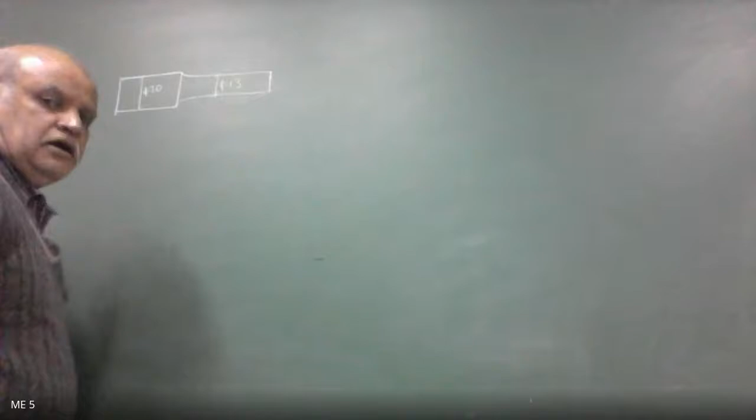And a fillet radius of 3 mm. So this is fillet radius of 3 mm, right? And it is subjected to F Newton upward and 3F Newton downward. So there is load F Newton upward and 3F downward. That is the load it is subjected to.

The shaft is stepped down from 20 mm to 13 mm, with a fillet radius of 3 mm.

The length of the shaft is 150 mm. So the total length of the shaft is 150 mm given in the problem.

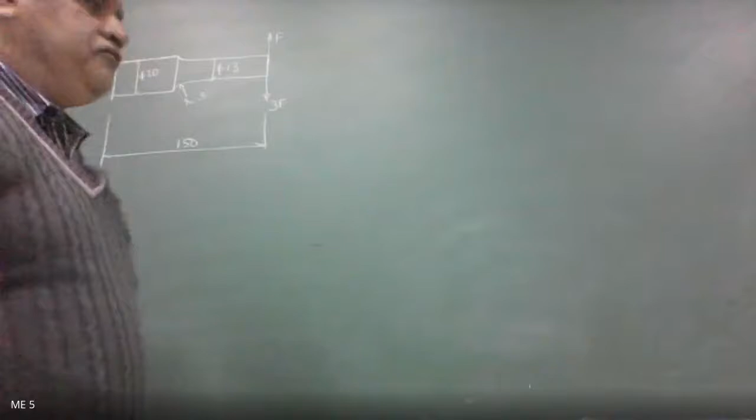The fillet section is at a distance of 25 mm from the fixed end. So this is the fixed end, and fillet section is at a distance of 25 mm from fixed end. So therefore, this distance is going to be how much?

125 mm. Okay, right. Determine the maximum load that the member can withstand for infinite life. Assume a FOS of 2.

The material is cold drawn C26 steel, for which yield stress is 470 Newton per mm square. Ultimate stress is 550 Newton per mm square.

Notch sensitivity for 3 mm radius for this material is how much? 0.9. Okay, so we are given with the value of yield stress.

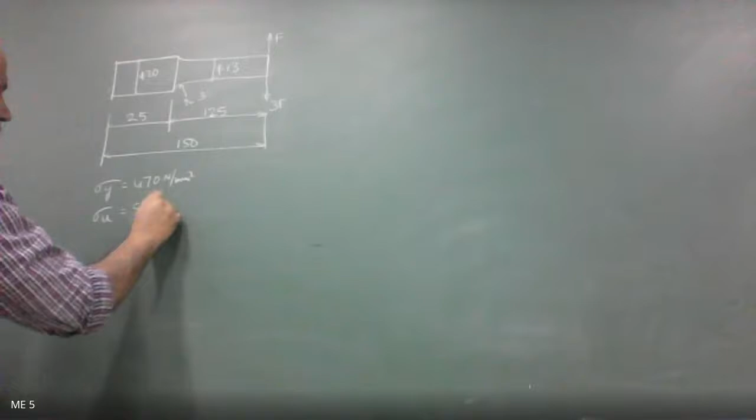What is the value of yield stress? 470 Newton per mm square. Then ultimate stress is given by sigma u is 550 Newton per mm square. And what else is given?

Notch sensitivity factor Q is equal to 0.9, and from the given description of the problem, we can make out capital D to be equal to 20 mm, small d is equal to 13 mm, and the radius of fillet is equal to 3 mm. This is what is given, and this distance is 125.

And we are given with factor of safety n is equal to, what is the value of factor of safety given there? Is equal to 2. Okay, this is the data that is given.

This is the sketch that we can make out. Is the sketch visible in your screens clearly? Yes, sir. Okay, because I have shifted my laptop a bit closer to board, that's why I just wanted to clarify.

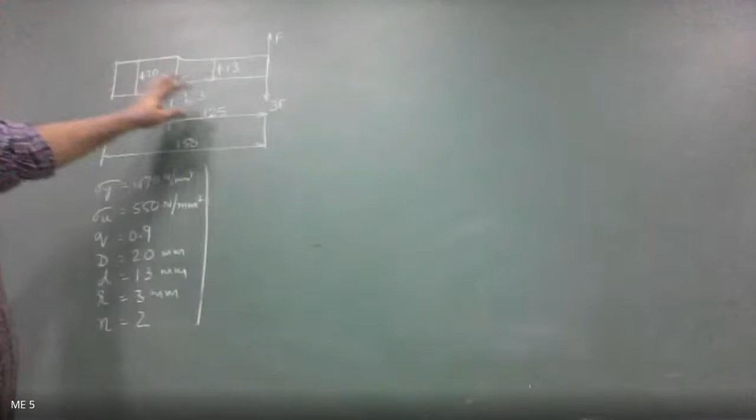So this is the sketch given in the problem. There's a stepped shaft which is stepped down from 20 mm diameter to 13 mm diameter. Total length of the shaft is 150 mm, and the step is at a distance of 25 mm from the fixed end, and it is subjected to F Newton upward and 3F Newton downward.

This also I can write: F max is equal to 3F, F minimum is equal to F.

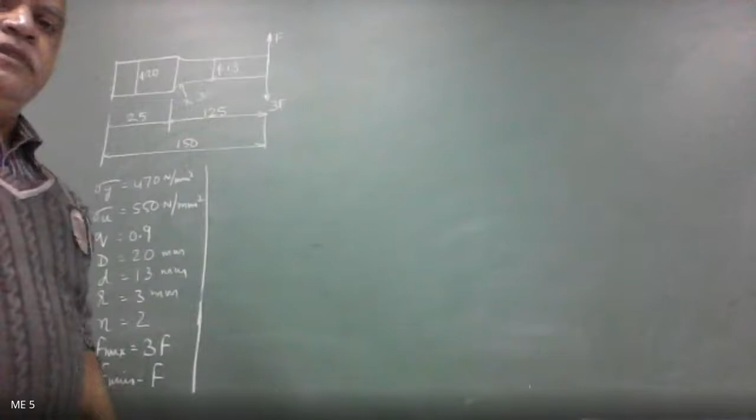Now, what is the type of stress that this component is subjected to? Is anyone there, or all have left?

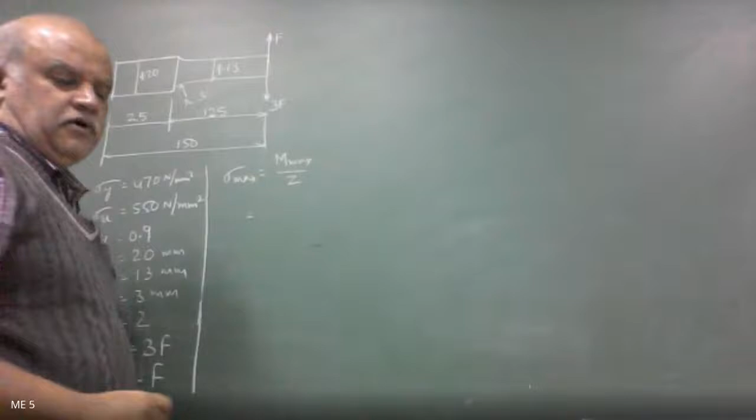Bending. Okay. Anyway, sigma max is equal to M max divided by Z. So we have F max, which is 3F, acting downward in clockwise direction. I take it as positive, and I take the one acting upward to be negative.

So therefore it is 3F into distance, with reference to change of cross section, so therefore it's going to be 125 divided by pi into d cube, that is pi d cube by 32, will give me sigma max equal to a value in terms of F. So that I'm going to get it as 1.74 F. Please check.

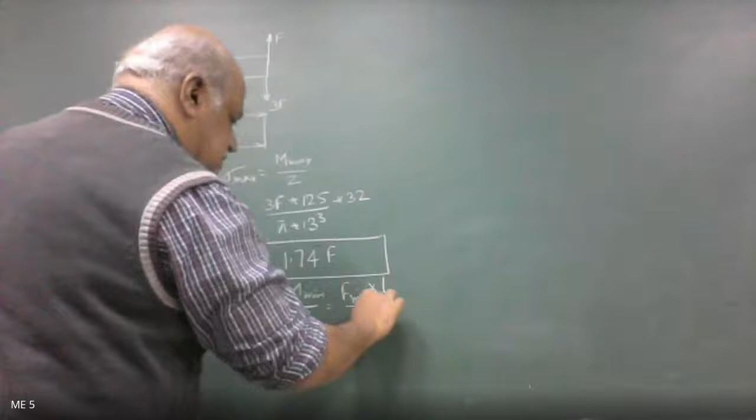Then sigma minimum is equal to M minimum divided by Z, that is equal to F minimum into distance L by Z. So here also it is F max into length divided by section modulus.

So therefore F minimum is minus F into distance is 125 divided by pi into 13 cube by 32. So therefore sigma minimum is equal to, you get another value in terms of F. Is that okay? Fine.

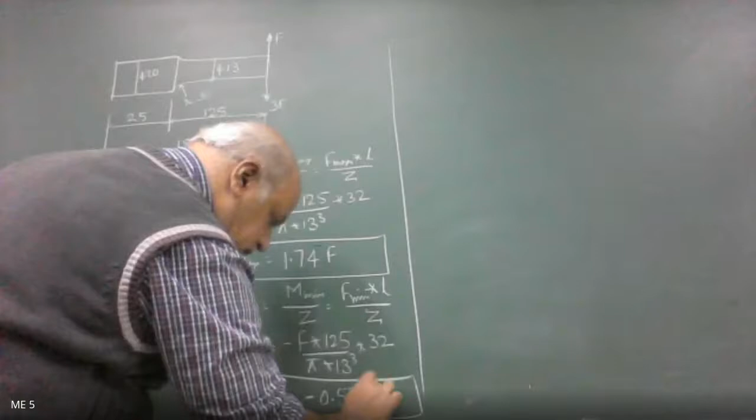0.579, minus 0.579 F. Correct? So this is what we get as minimum.

Maximum and minimum we have got. Next job is to find sigma mean, that is sigma max plus sigma minimum divided by 2. So sigma m is equal to 1.74 plus minus 0.579 divided by 2. What is the value of sigma mean? You'll get sigma mean to be equal to 0.58 F.

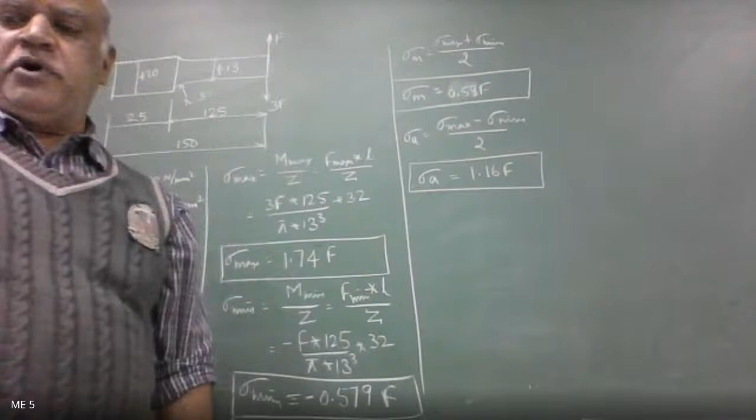Correct? Please check. Sigma amplitude is sigma max minus sigma minimum divided by 2. So stress amplitude is equal to 1.74 minus minus 0.579 divided by 2. That should give you stress amplitude equal to 1.16 F. So stress amplitude I get 1.16 and this 0.58 F is the mean stress.

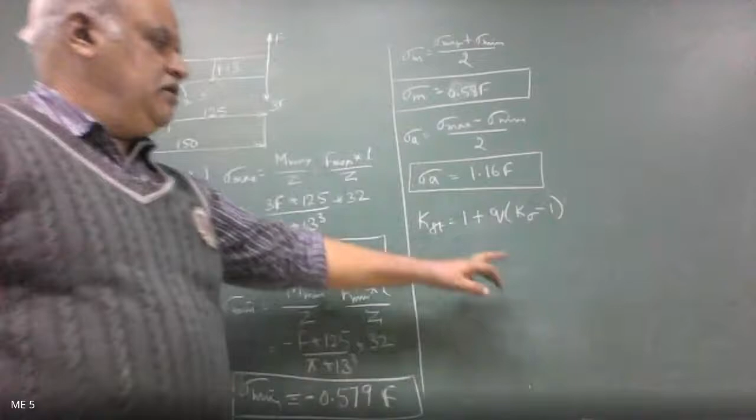Now we are given with notch sensitivity factor Q also. It's a stepped shaft with fillet radius given. So my job: KFT is given by 1 plus notch sensitivity factor into theoretical form factor minus 1. So we need to find out K sigma for the given member.

For that, we are given with capital D and small d. Find out capital D by small d, that is 20 by 13. That should give you the value 1.54. And R by D is 3 by 13, that is equal to 0.23.

Now get me the value of K sigma. It's a stepped shaft subjected to bending moment. So from the given graph, we get K sigma to be equal to

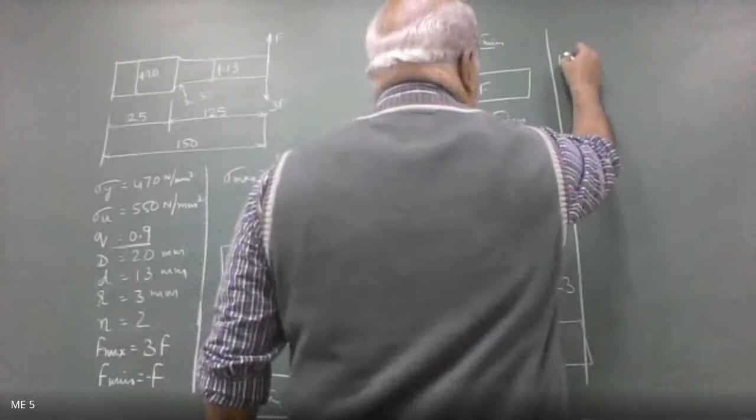1.38. Substitute this value of K sigma in the equation of fatigue stress concentration factor to get KFT value. So when we substitute, KFT is equal to 1 plus 0.9 into 1.38 minus 1. That should give us KFT to be equal to 1.34.

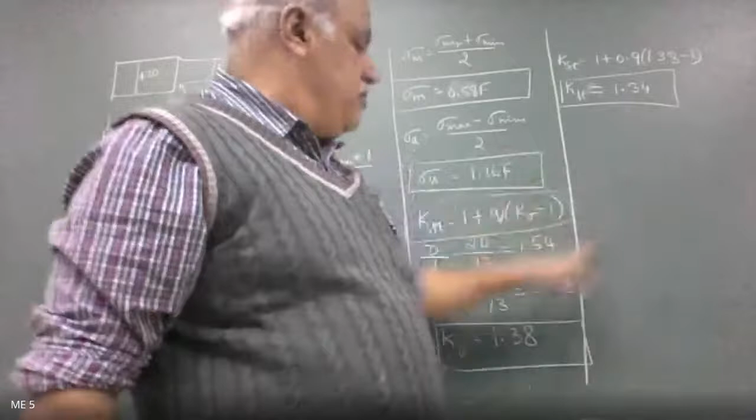So you see, because of presence of notch sensitivity, the theoretical form factor is reduced from 1.38 to 1.34. That is the actual effect of presence of a discontinuity in the form of a step.

So now, what is the equation for Soderberg's relation? KFT into sigma A divided by ABC into sigma endurance plus sigma mean by sigma yield is equal to 1 by n. So what are the values of ABC? Has he given it in the problem?

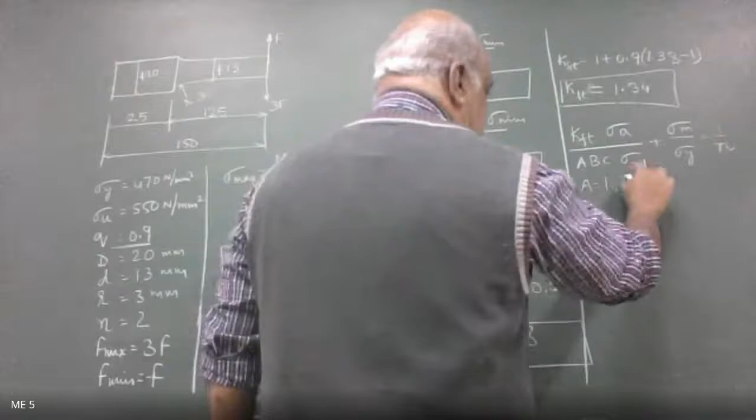No, he has not given it in the problem. So I take it as A to be equal to what, according to the assumptions we made in the beginning? Can you note for bending, what is the value of A? A will be 1, sir. B is equal to 0.85 and C is equal to 0.85.

So therefore, it is 1.34 into stress amplitude 1.16 F divided by 0.85 square into endurance stress - has he given you that? He has not given you. So endurance stress we can take as sigma endurance equal to 0.5 times sigma u. So it's going to be 250 plus 25, that is 275.

275 plus mean stress 0.58 F divided by yield stress 470 is equal to 1 by 2. So therefore, the value of F is equal to this value.

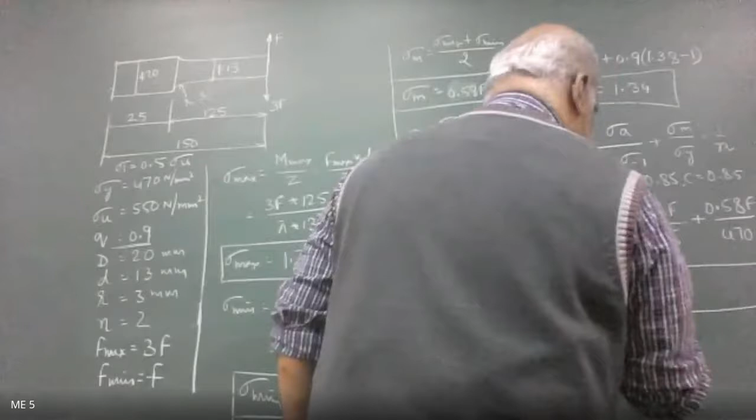Please note down, those who have probably memory would have forgotten what these are. We were working on fatigue, design for fatigue strength. This problem was asked twice for 15 marks, so it's very, very simple.

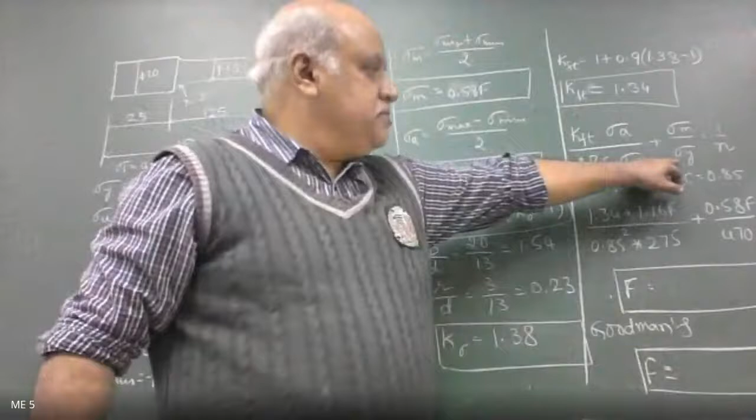Get a diagram, find out maximum stress, minimum stress, mean and amplitude, and get stress concentration factor for a stepped shaft subjected to bending, then substitute in Soderberg relation. Similarly, since ultimate strength is given, from Goodman's relation you find out what is F. So in place of yield stress, we substitute ultimate stress and then find the value of F from Goodman's relation.

Yeah, give me the value of F here.

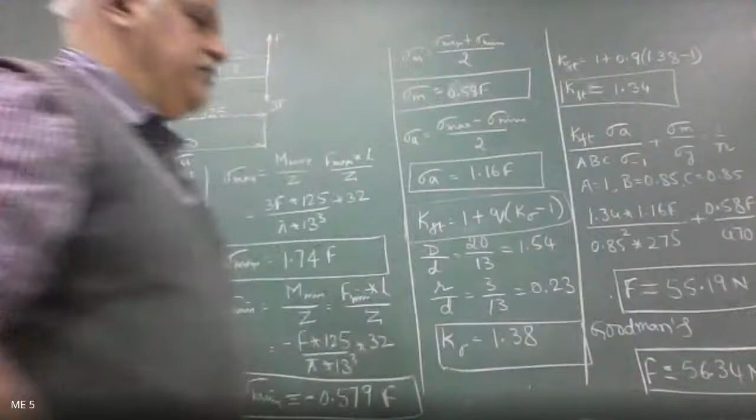55.19 Newton according to Soderberg relation. Then according to Goodman, 56.314, yeah, 56.34 Newton is what I got. So that variation is acceptable.

So this is how we solve the problem when you have a stepped shaft subjected to two different loads. The only thing is we need to find out M max. Please remember, while calculating bending moment, you should not take the entire 150 mm length. We have to take where there is a changeover of cross section, because there you will have maximum stress or high stress zone. So therefore we need to take 125 and not 150. The moment you take 150, the entire problem is going to be off. You won't get any marks beyond 1 or 2 for writing the formula. Out of 12 marks, you will not get even 2 marks. So be careful while calculating bending moment. It should be with reference to the changeover of cross section.

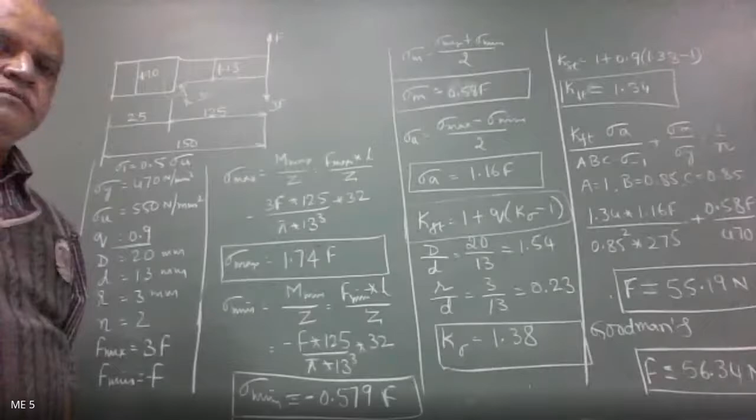Okay, you people are there? Yes sir. If you are finished, yes we will sir. Let's go to the next.

Please note down. This is minus F because of counterclockwise direction of rotation. 3F is positive because of clockwise rotation. So we can write here positive because of clockwise rotation, and this is negative because of counterclockwise direction of rotation.

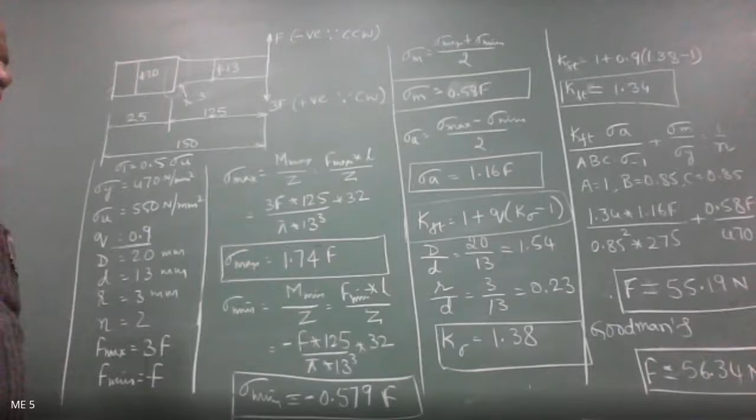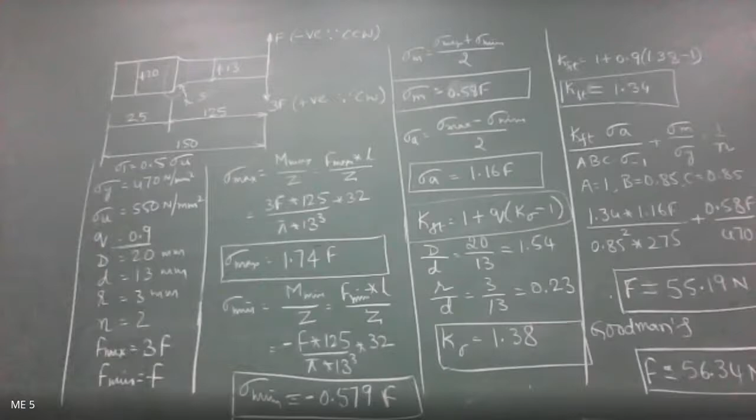Anybody needing time to note it down? Shall I remove this? No response for whatever.

Okay, next we'll take up design for combined fatigue stresses.

Yes sir, have you noted down? Finished sir, done sir. I'm not asking you whether you are present or not, I'm asking have you noted down the solution? Yes sir. Then somebody should say yes or no. Otherwise, Ritik Shah, have you noted down? One minute sir, noting down. You should tell no, otherwise if everybody keeps quiet, no... so we are true citizens of India, huh, we don't open our mouth for anything. Correct, Ritik Shah? No sir.

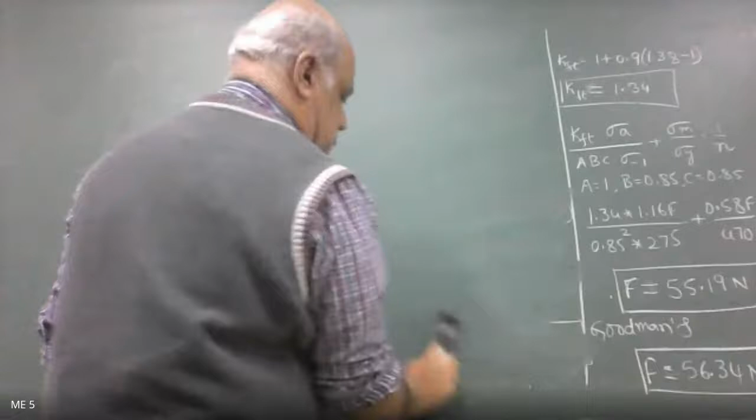Next, you take down: design for combined fatigue stresses.

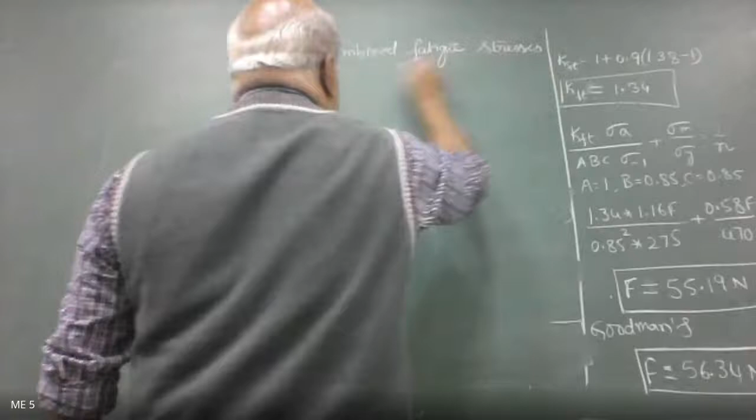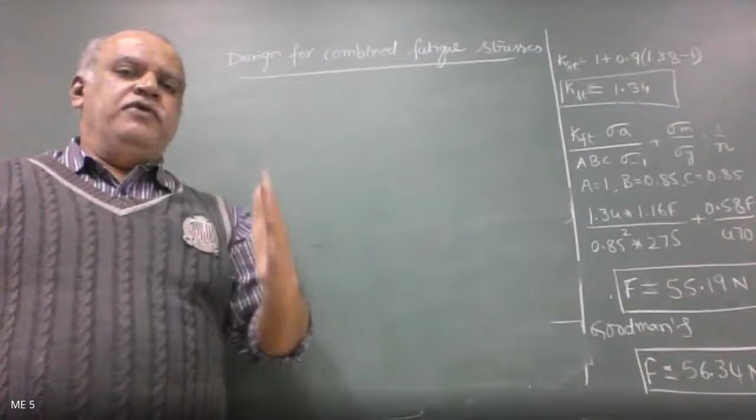Most machine components are subjected to combined fatigue stress. So far we have solved problems where it was only subjected to transverse load or axial load or only torsional load, having values of minimum and maximum. Now we are taking up cases wherein components like a propeller shaft or a power transmission shaft are subjected to variable bending as well as variable torsional loads. So when you have combined load, if you remember the previous chapters where we solved problems on combined loading, with bending stress as well as torsional shear stress, what did we do finally?

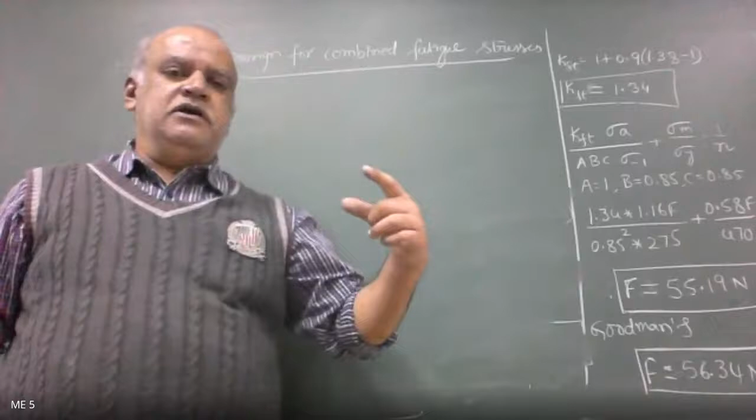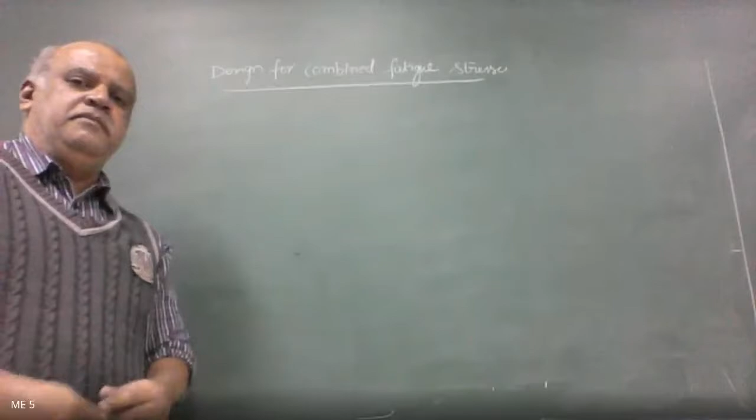What is it that we found out finally when we have bending and torsion both in a component? Can anyone remember? Can anyone tell me? When you have a combined loading case, what is it that we did?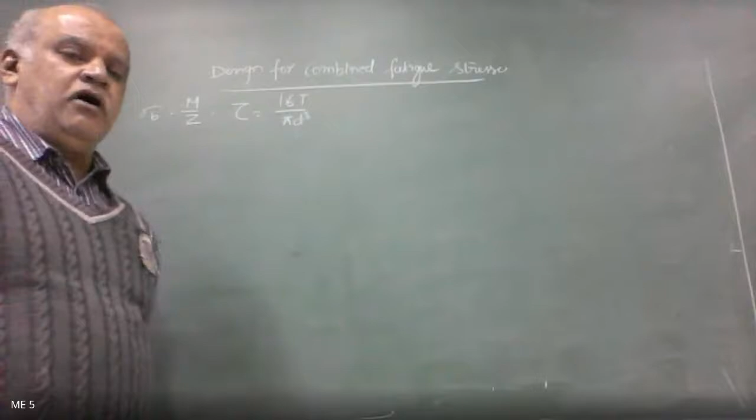So we had sigma B given by M by Z. We had shear stress given by 16T by pi d cube. So when you have a combined loading case, what is it that we found out? We found principal stresses sigma 1 and sigma 2, given by half of sigma plus or minus root of sigma square plus 4 tau square. Is that correct?

Yes sir, we found principal stresses sigma 1 and sigma 2 when you have both bending and shear. Now in fatigue, we will have sigma B maximum, sigma B minimum, tau max, tau minimum. So instead of 2 parameters, we'll have 4 parameters. Again, we are going to find principal stresses for those combined equivalent stresses, that is what we do here.

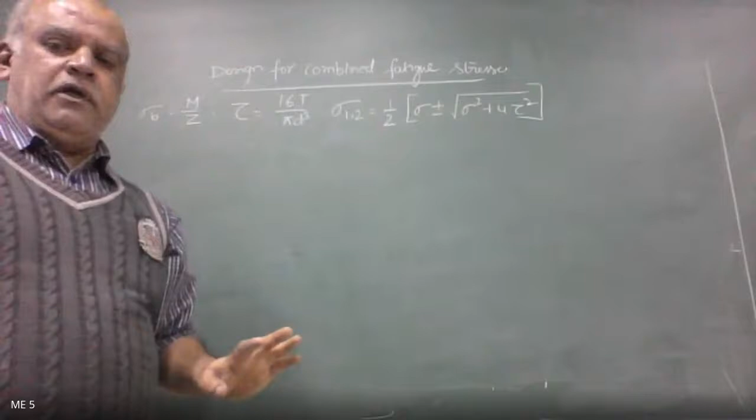So for that, we are going to find first sigma equivalent, given by mean stress plus KFT into sigma A into sigma yield, divided by ABC into sigma endurance. This will give you equivalent normal stress, where you find sigma mean as well as sigma amplitude using the same equations. And this is given by equation 2.22a, in page number... what is the page number? Give me the page number. I want someone to give the page number of this equation.

Do you have the data handbook with you? 26 sir. Yeah, 26.

26. Then tau equivalent is given by tau mean plus kf tau into tau A into tau y divided by ABC into sigma endurance. This is given by equation 2.22b in page number 26.

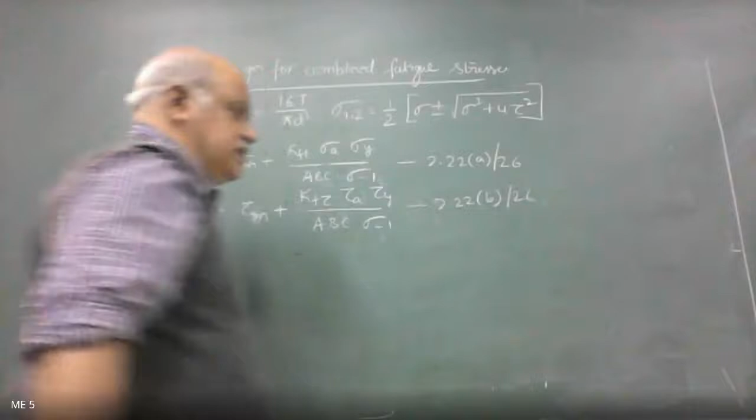This will give you equivalent normal stress. This will give you shear equivalent stress. Equivalent shear stress, equivalent normal stress. This we obtain by sigma max and sigma minimum. Here this we obtain using tau max and tau minimum.

Are you there with me? Now we have found out sigma equivalent, that is equivalent normal stress, equivalent shear stress. Now we need to find out, similar to principal stress here, we need to find out sigma dash max, that is given by half of sigma equivalent plus or minus root sigma equivalent, or we are going to find out only the maximum stress. So sigma equivalent plus, what is the equation that we have?

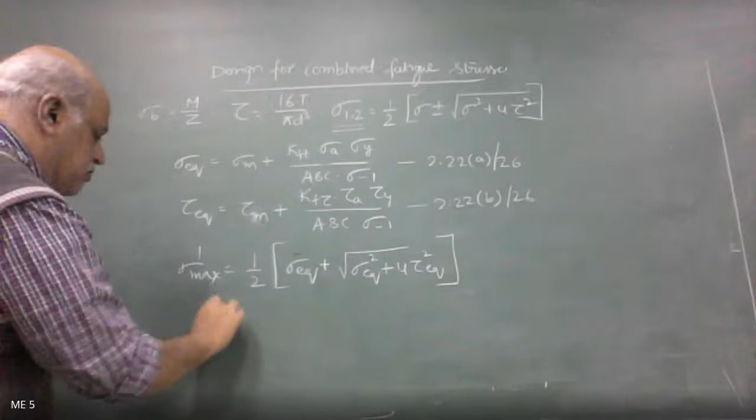Sigma square equivalent plus 4 tau square equivalent will give you sigma dash max, and tau dash max is given by half of root sigma square equivalent plus 4 tau square equivalent. Is that okay? Please give me the equation number for this.

Please give me the equation for total equivalent normal stress. What is the equation number? This will give you total equivalent normal stress. This will give you total equivalent shear stress.

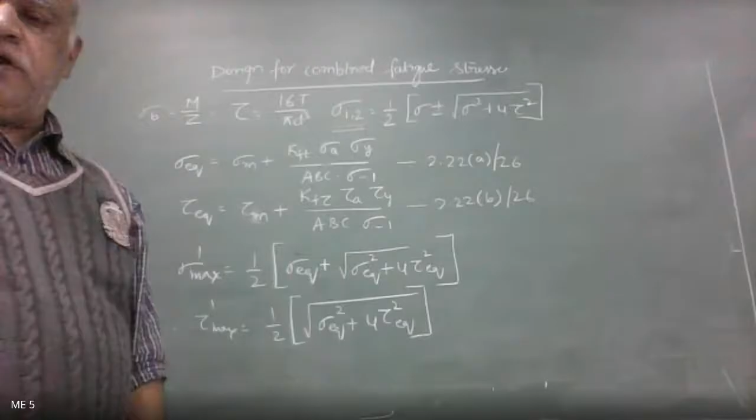2.23b, sir. 2.23b is this equation, in page number 26, and this is 2.23a in page number 26, correct? So please note down these 4 equations.

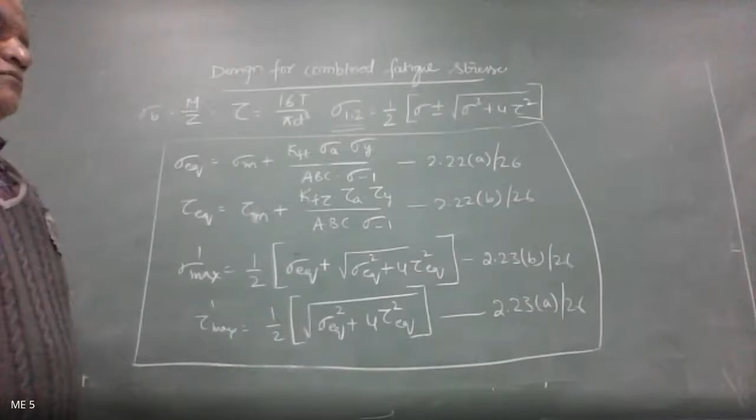Are you with me? Yes, sir. Are the equations visible clearly for you on your screens? Yes, sir. Please note down, please note down. By that time I'll take attendance.

Answer your roll call. 1, Present, sir. 2, 3, 4, Present, sir.

Is Prayag Vasudevan there in class? Yes, sir. Prayag, you are there. Yes, sir. Why did you submit again on November 9th? Sir, it said that after you had graded the marks, the file was missing. No, it's not missing because of network, or it would have come back. Now it has happened such a way that I cannot evaluate your book also. Why do people do this, sir? Sir, I had already submitted it, but I forgot about the marks. Sir, I already got the marks. No, but for me the answer book is missing, that's what. Okay, sir. But you cannot get the marks now. When I download, you will not get your marks, sir. Okay, sir, don't do all such nonsense. Exam is on 5th and you resubmitted it on 9th. Is it not idiotic?

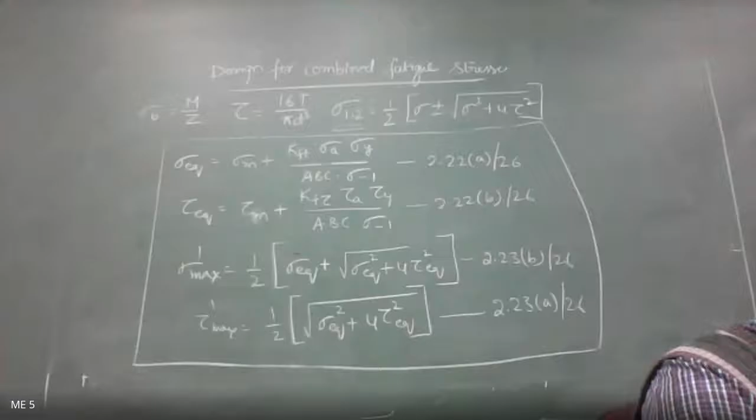21, Yes sir. 22, Present sir. 23, Yes sir. 24, 25, 26, Present sir. 27, 28, 30, 31, 32, 33, Present sir. 34, Yes sir. 35, 36, 37, 38, 39, 40, Yes sir. 41, 42, Yes sir. 43, Yes sir. 44, Present sir. 45, 46, 47, Yes sir. 48, Yes sir. 49, Yes sir. 50, Yes sir. 51, 52, Yes sir. 53, Yes sir. 54, Yes sir, present. 55, 56, 57, 58, 59, 60, Yes sir. 61, Yes sir. 61, Vinay J.

Are you present? Yes, sir. Where were you for so many classes? Sir, I wasn't feeling well, sir. I wasn't feeling well, sir. Not feeling well for how long? Right from 29th September to November. What was the problem, Vinay? I had throat problems, sir.

Please note down. Most of the machine parts are subjected to combined stresses. Example, a rotating shaft. In such cases, it is recommended to compute equivalent static stress.

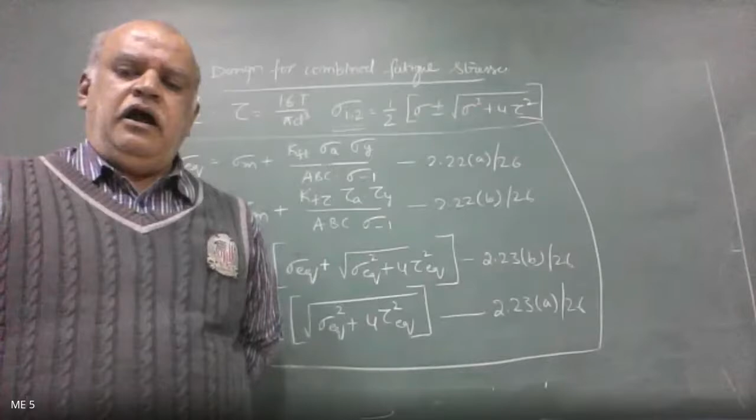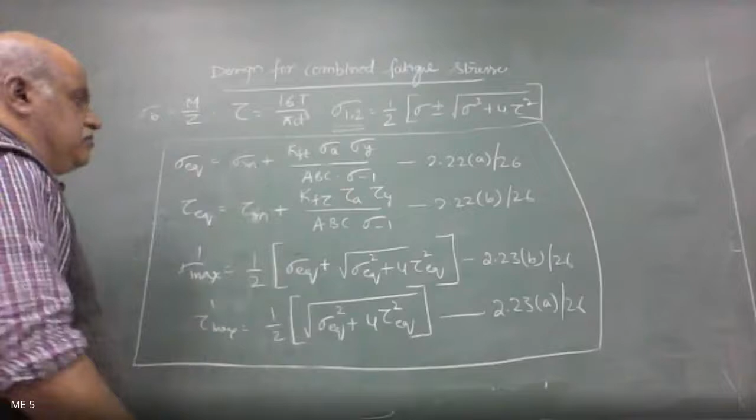When a shaft is subjected to combined bending and torsional variable stresses, we first compute mean and amplitude of bending and torsion. That is, we find sigma mean and sigma A, tau mean and tau A - mean and amplitude of bending and torsion - then find normal equivalent stress, sigma EQ.

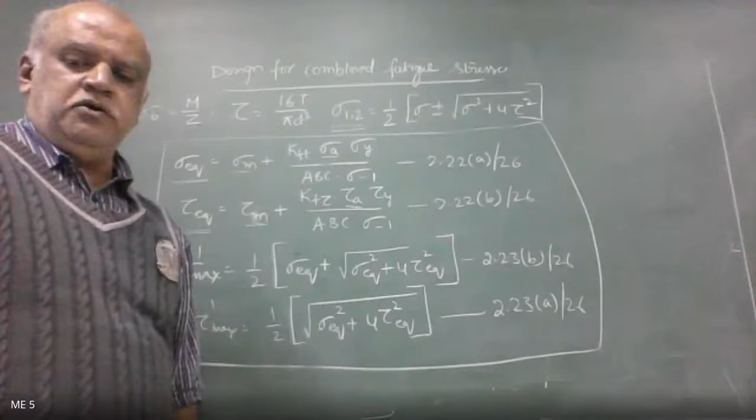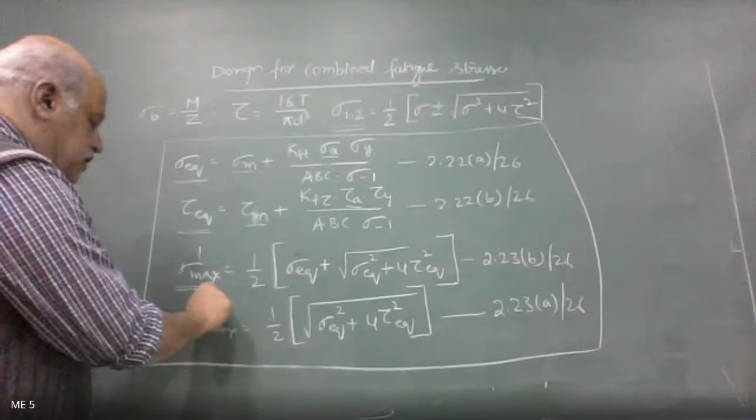Normal equivalent stress, sigma equivalent. Next, shear equivalent stress, tau EQ, then find total equivalent maximum stress - sigma dash max and tau dash max.

Is that okay? Is it okay? Yes, sir.

We'll take up a problem. Tarun, what is the problem that we have taken? Second problem.

Sir, a cantilever beam of circular cross section is subjected to alternating stresses. Okay, alternating. Yeah, I'll go through the problem. All of you, please look into your notebooks.

A cantilever beam of circular cross section is subjected to an alternating stress at a point on the outer fiber in the plane of support that varies from 21 megapascal compression to 28 megapascal tension. Correct? Is it correct? Yes, sir.

The material has an ultimate strength of 412 megapascal, yield strength of 309 megapascal. Assume that the actual stress concentration factor is equal to 1, size correction factor is 0.85, surface correction factor 0.9. Determine equivalent normal stress due to axial loading.

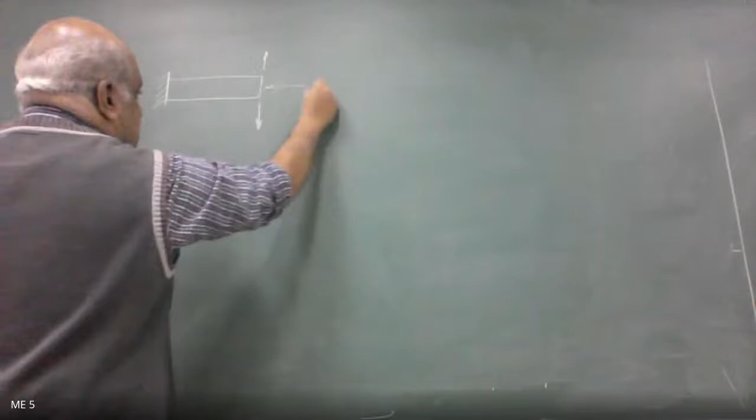That is, there is a cantilever beam. All of you please observe. So there is a cantilever beam which is subjected to tension and compression, and at the same time it is subjected to axial compressive and axial tensile stress - it is subjected to compression and tension.

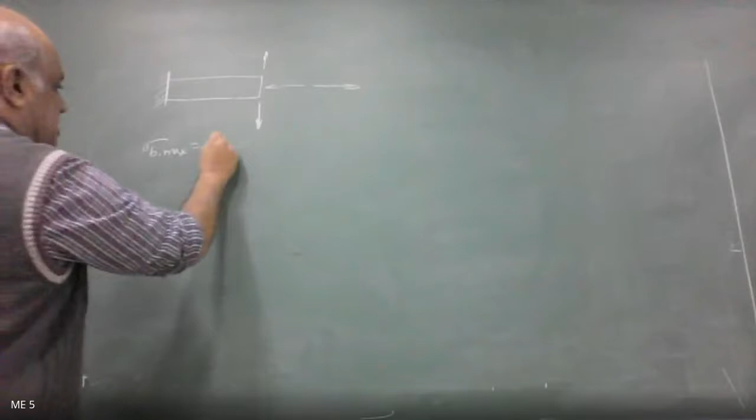Okay, at the same time, he has given you that sigma B max, that is maximum bending stress - what is the value? 28 megapascal in tension, correct? So therefore this is a positive value, 28 megapascal. Then sigma B minimum is equal to minus 21 megapascal because it is compression, correct?

And this is positive because it is tension given in the problem. At the same time, there is an alternating stress due to axial load that varies from 14 megapascal compression. That is, sigma axial minimum is equal to minus 14 megapascal, and sigma axial maximum - how much it is subjected to variable stress - sigma axial maximum is 28 megapascal.

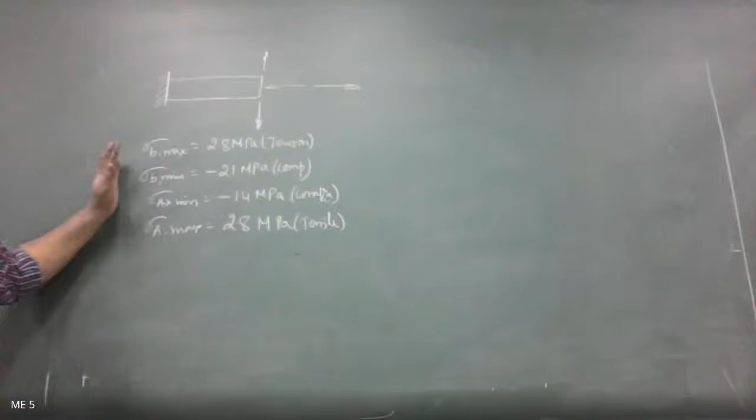This is positive, this is negative, because the problem has given this to be compression and this to be tensile. Okay, this is the data that we have got, and then he has given you the value of ultimate strength - sigma u is 412 megapascal.

Then sigma yield is equal to - what is the value? 309 megapascal. This is given, and we are not given endurance stress, so therefore it is 0.5 times sigma u, that is equal to 206 megapascal, and we are given the values of B and C, correct? So therefore I take A is equal to 1, B is equal to 0.85, C is equal to 0.9, given in the problem.

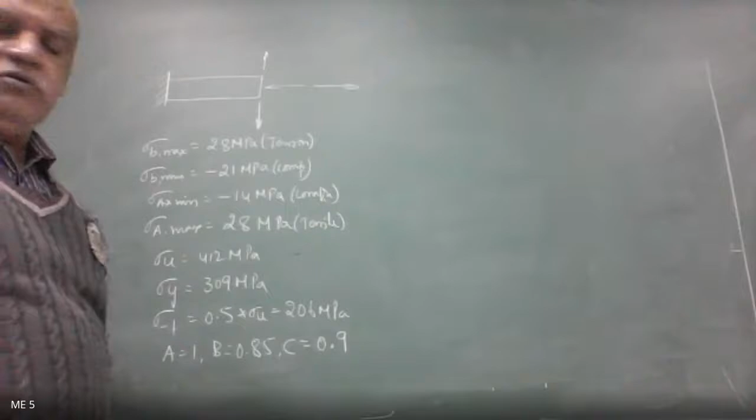He has given you the theoretical stress concentration factor KFT to be equal to 1. He has asked us to take it as 1. So this is the total data that we can extract from the given problem.

There is a cantilever beam subjected to tension stress of 28, compressive stress of 21 megapascal, and at the same time it is subjected to axial loading of 14 megapascal compression and 28 megapascal tension. We are given ultimate and yield strength of the materials, endurance we can extract, ABC values are given, and KFT is equal to 1. So what he has asked is equivalent normal stress due to axial loading and equivalent normal stress due to bending.

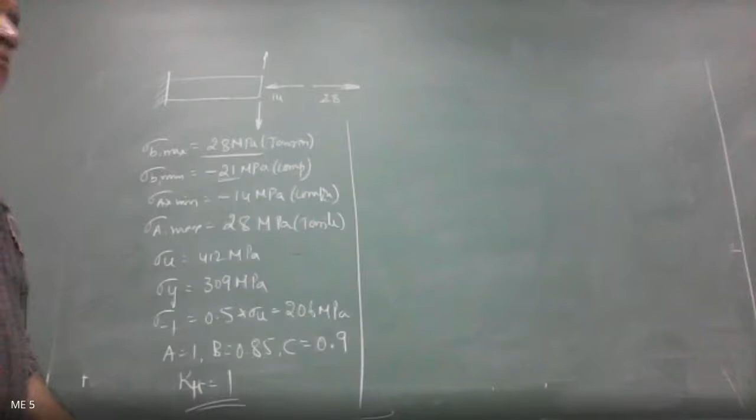So we have sigma equivalent given by what equation? Sigma m plus KFT into sigma A into sigma y divided by ABC into endurance. Same equation holds good for both bending and axial now because there is no torsion.

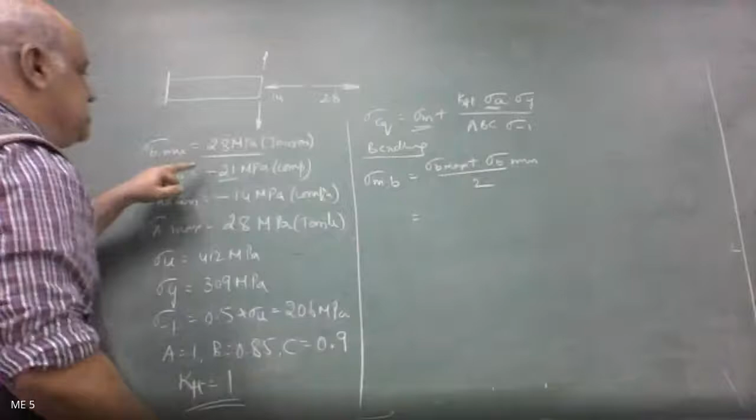First I will take up bending stress. I have to find out mean and amplitude. Sigma mean in bending is equal to sigma b maximum plus sigma b minimum divided by 2. Sigma b max is 28 plus sigma b minimum is minus 21, divided by 2, which is 7 by 2, that is 3.5 megapascal. This is sigma mean in bending.

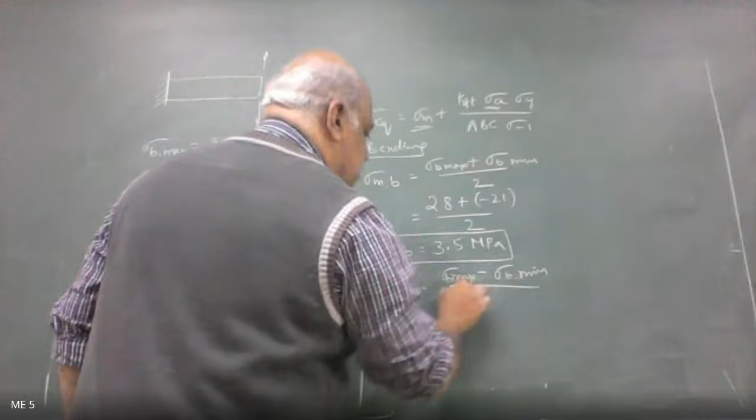Sigma amplitude in bending is equal to sigma max minus sigma b minimum divided by 2. So it is 28 minus of minus 21, that's going to be plus, that is 49 divided by 2. So sigma amplitude in bending is equal to 24.5 megapascal.

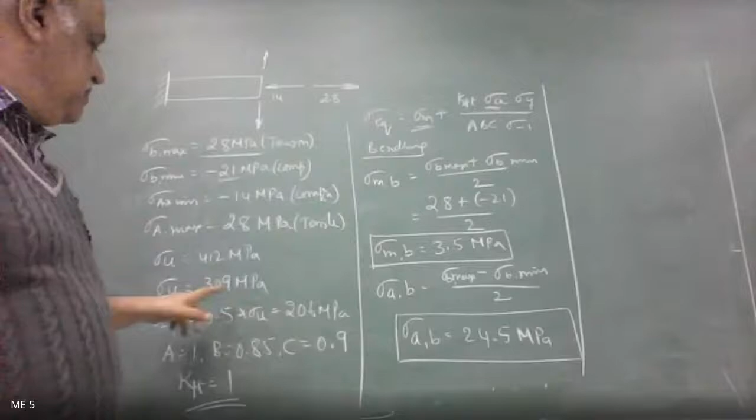So I know the mean, I know the value of amplitude, I know the value of ABC, KFT is taken to be 1, yield stress is given, and then find out equivalent stress in case of bending. Sigma equivalent in bending equals, what is the value of mean stress?

3.5 plus KFT is 1 into stress amplitude 24.5, into yield which is 309, divided by ABC 1 into 0.85 into 0.9, into endurance which is 206. So sigma equivalent bending is equal to 51.54 megapascal.

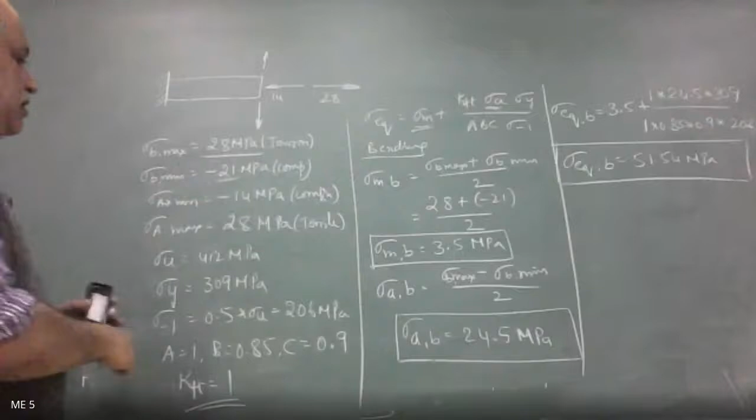Similarly, go for axial loading of 14 and 28. Substitute in the equivalent stress equation and get sigma equivalent axial. For axial loading, sigma mean axial is equal to 28 minus 14 divided by 2, that's 7 megapascal. Sigma amplitude axial is equal to 28 plus 14, that is 42, divided by 2, that's going to be 21 megapascal.

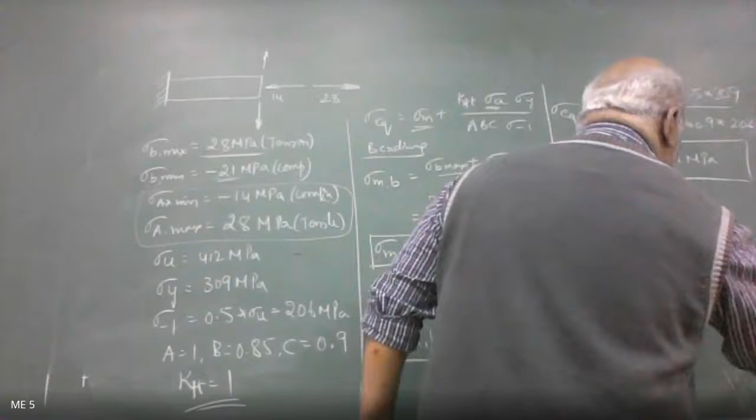So sigma equivalent axial will be equal to 7 plus 1 into sigma axial which is 21, into yield stress 309, divided by 1 into 0.85 into 0.9, into endurance 206. So sigma equivalent axial is equal to, any doubt in this?

Mean will be 3.5. No sir, how much? 3.5? Sir, mean, axial stress mean value, sir. Mean is 7, axial is 21. Equivalent stress, what is the total equivalent stress? Got it, sir.

Is it 48.2? 48.17, yes that's correct. That is 48.17 megapascal.

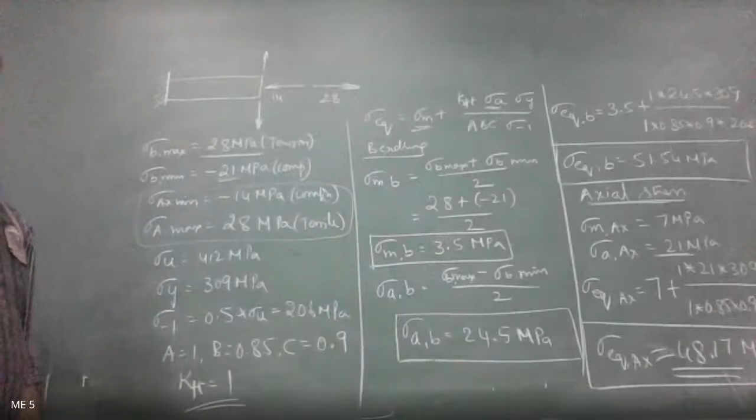Any doubt in this? It is subjected to combined bending and axial. So in that he has given you directly the stresses, we need not find stresses. Stresses are given, maximum and minimum. So find out mean and amplitude, substitute in equivalent stress.

Similarly, take axial stress, find out mean and amplitude, substitute again in equivalent stress. You will get sigma equivalent for axial load and sigma equivalent for bending stress. So when you are given with both axial and bending, what will be the total equivalent stress due to axial and bending?

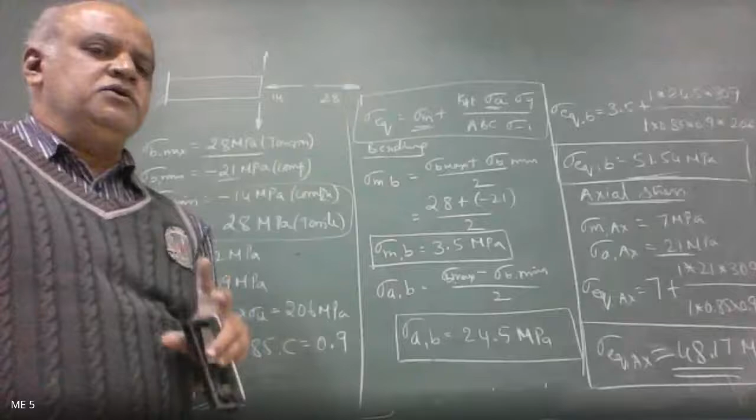What we used to do earlier, when given both bending and axial, what was the total stress we used to take? Principal stress, yeah.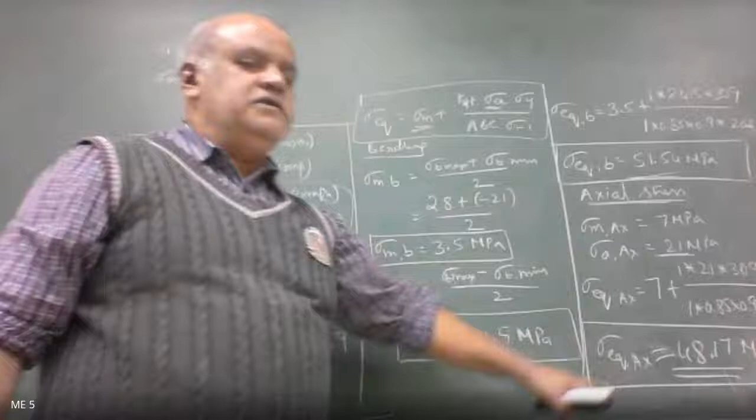When we were given sigma bending and sigma axial, sigma dash total, sigma dash max is equal to how much? Add both. Sigma equivalent bending plus sigma equivalent axial will give us total equivalent normal stress, correct? Due to axial and bending. So therefore, total equivalent stress.

Total equivalent stress is equal to sigma equivalent bending plus sigma equivalent axial. What is the value there? 51.54 plus 48.17. What is it going to be? 99.7.

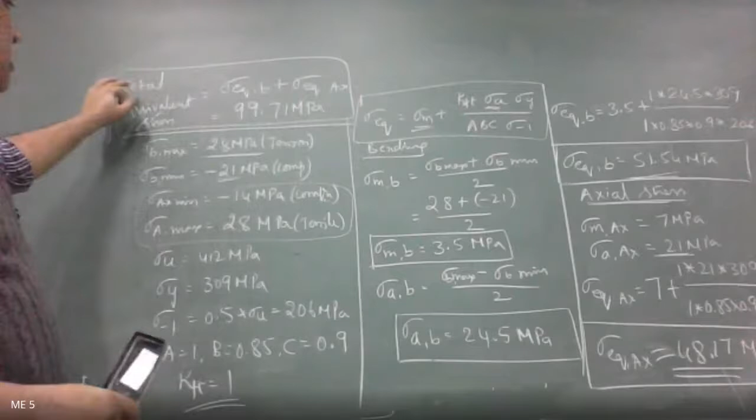When you are given with bending and torsion, or axial and torsion, we used to find out using half of sigma plus or minus root of sigma square plus 4 tau square. But now both bending and axial only are given. Total equivalent stress will be equivalent stress because of bending plus equivalent stress because of axial. Sum them up, you will get the total equivalent stress due to axial and bending. Is that okay?

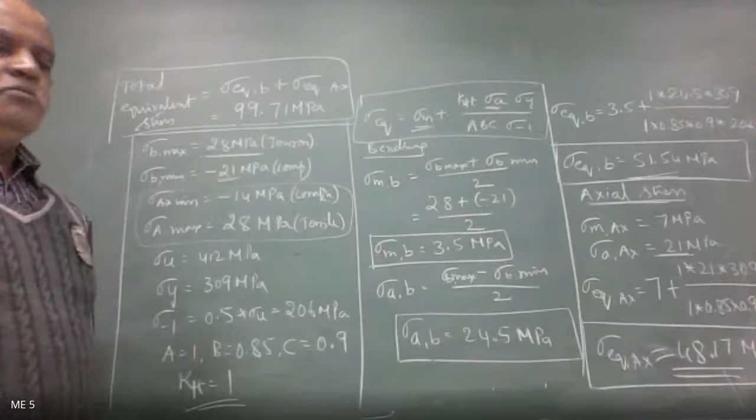This is problem number 2. Such problems will be asked for 12 marks minimum, so you cannot make a mistake at any stage. It will be very, very simple. Only thing is, your presence of mind should be there in the problem. If you think something else and keep doing this, you are going to go wrong. It is very, very simple.

You are given with maximum bending and minimum bending, maximum axial and minimum axial. You need to find out mean and alternating in both the cases. Go to equivalent stress, substitute, and get the answer. That's it, okay.

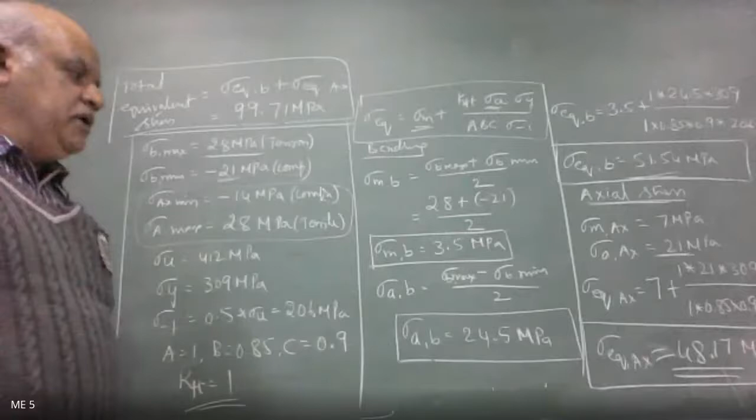A ground steel cantilever member as shown in figure is subjected to transverse load at its free end that varies from 100 Newton upwards to 200 Newtons downwards. This is the problem. Anybody needing time to note it down? 1 minute, sir.

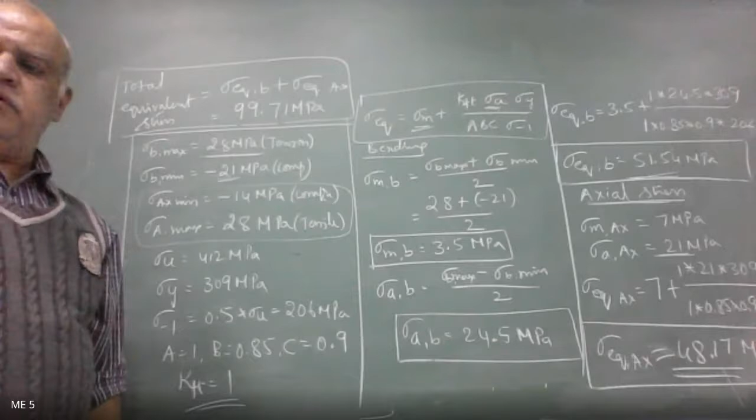That problem we are going to take up was asked for 20 marks totally, straight away one full question for 20 marks, on similar lines. Only thing is, we need to find the K sigma here additionally. Anyway, we'll take it up as a challenge. Let's see how you people will work on that.

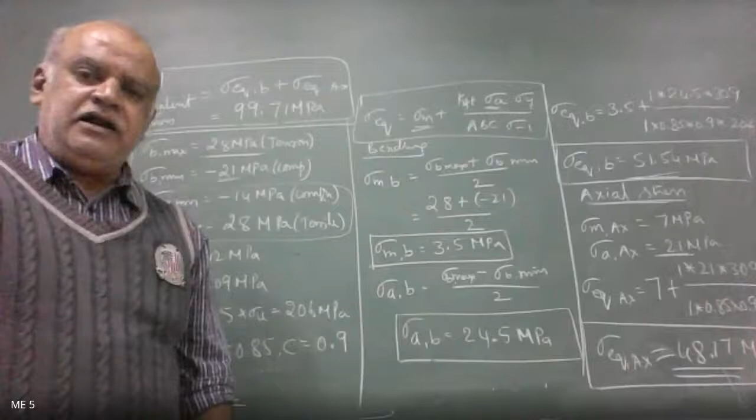So the figure for this problem, I mean for this sum, I'll have to explain. As shown in figure, he has given. I'll give that now, just hold on. Yeah, note down.

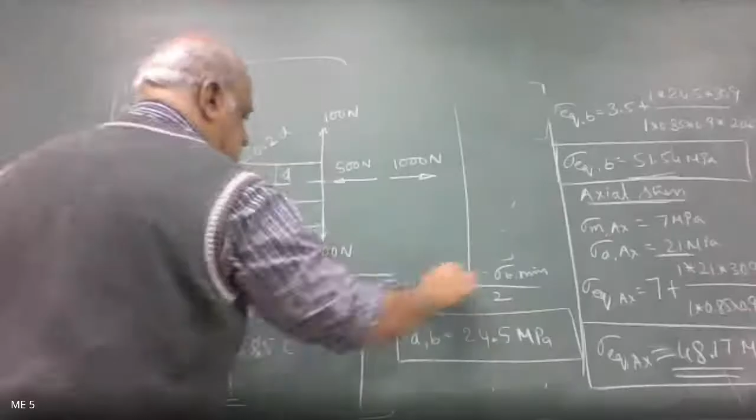This was asked for 20 full marks, one full question, in one of the examinations of VTU. Solve this, and you need to find out what finally? You need to find out the diameter, I think. Yes sir, the required diameter of the section using factor of safety of 2. So you need to find diameter for this.

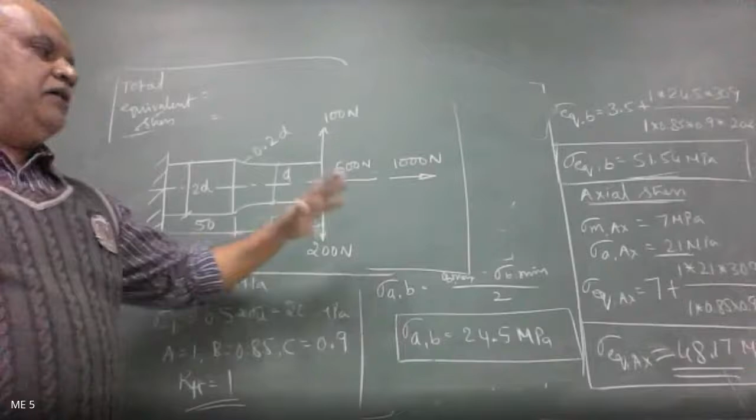So you have minus counterclockwise, minus 100 into 150, plus 200 into 150, is my M max. Then you have compression 500, 1000 tensile, but you don't know the diameter, right? So you need to carry till the end the value of D, and at the end you will get the value. Total equivalent will be equal to equivalent bending plus equivalent axial stress. Okay?